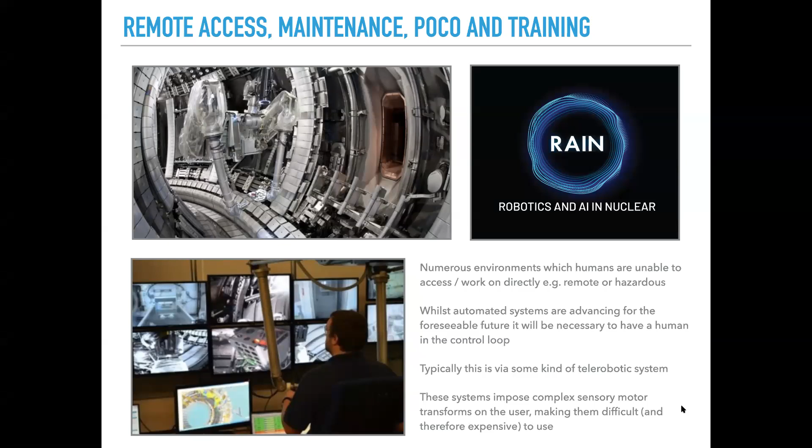So the key to a teleoperation system is making working in the remote environment as effortless as if you really are there yourself. People use this kind of phrase that the system should be transparent to the user. Here you have just a simple schematic from Barfield.

We have our user in a remote location operating some kind of hardware in the environment, interacting with real-world objects, and the user is getting some kind of sensory feedback from the robotic device, which they're using to control it.

The key thing here is that the user has to build some kind of mental model as to the relationship between their own movements and the movements of the robot. In some senses, the ideal situation is that the kinematics of the user and the kinematics of the robot have a one-to-one mapping with one another. However, this is clearly not possible in most instances.

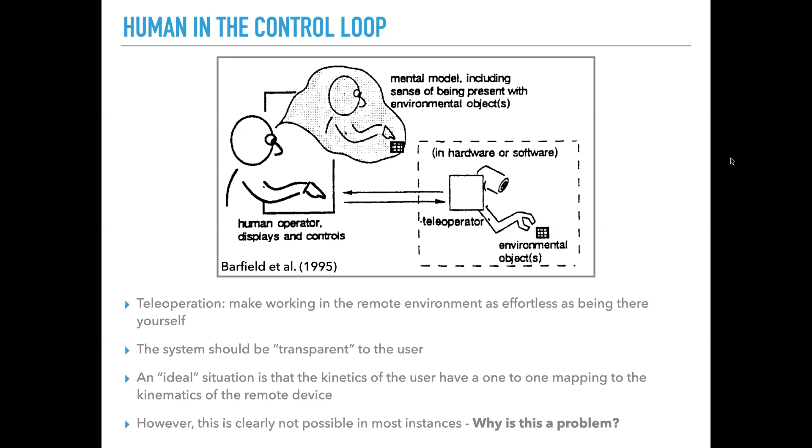So why is this a problem? Well, the brain is just a fancy computer in effect, a neural computer, but a fancy computer nonetheless. And it takes in information in the form of sensory inputs, does some kind of computation on those sensory inputs, which results in some kind of motor output.

And that motor output might be something very simple, such as picking up an object in everyday life, or indeed it might be something much more complicated, such as using a teleoperation system.

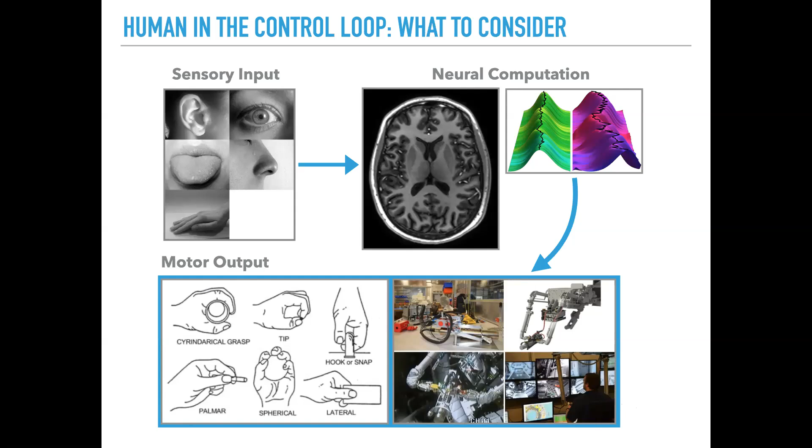There's actually a lot of clear evidence that in programming sensory motor actions, the human brain effectively computes an internal forward model of the action in order to predict the sensory consequences of that action. Then the brain compares this to the actual sensory feedback from doing the action. This comparison allows the brain and the user to learn how to do a task and indeed improve a task over time. We can kind of see that in this schematic here.

So the brain produces a motor command which is sent to the sensory motor system. The action is performed and the observer gains some kind of sensory feedback. The key thing here is that actually what happens in the brain is the motor command is duplicated into what is called an efference copy.

This is used to predict what the sensory consequences of the action will be. Then the two are compared and some sort of sensory discrepancy is computed. In doing this, this allows the user to improve at the task over time.

The key thing is that there's a huge amount of evidence that shows that imposing sensory motor transforms negatively impacts performance, slows learning, and indeed requires some kind of adaptation procedure over time.

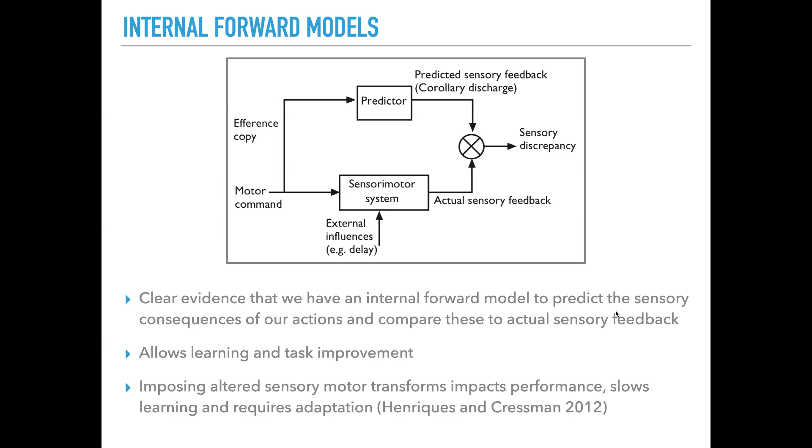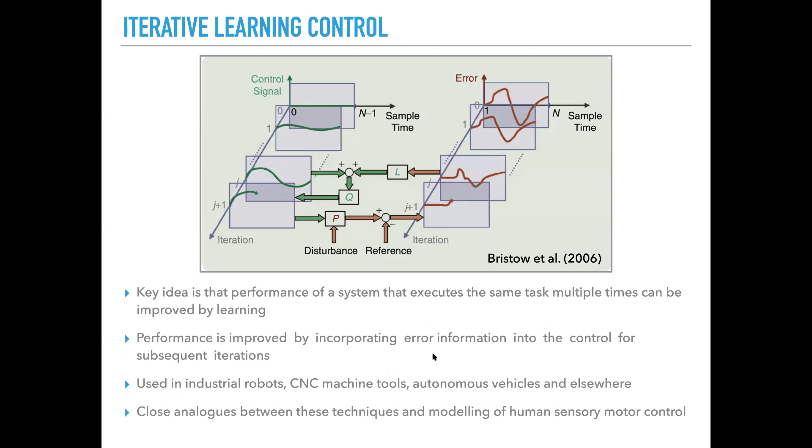This is actually a very engineering-focused model, even though it's modeling brain processing. Some of you may be familiar with models such as this, the iterative learning model, used in a wide range of areas of industry and engineering. The key thing here is that through comparing a prediction to an error, one can improve performance of such a system over time.

So let's go back to where we started. This was our example. So what's the problem to be solved here?

Well, clearly, in most telepresence systems, there's a mismatch between the kinematics of the human operator in the control room and the kinematics of the robot in the remote environment. This obviously makes it very hard for the user to predict the sensory consequences of their actions. They don't know how their actions map onto actions of the robot.

A second issue is with this other part of the loop: it's really difficult for the human user to get precise sensory feedback as to the results of their actions. For example, an operator has to track their movements over multiple screens, and in a hazardous environment, these screens might be placed at very odd angles relative to the user, or provide impoverished information.

A final problem is that the user doesn't have access to a lot of information they normally would. For example, there's no stereo vision here from the remote environment. And as the observer moves their head, these views don't update as they naturally would. So that's the problem we're looking to investigate.

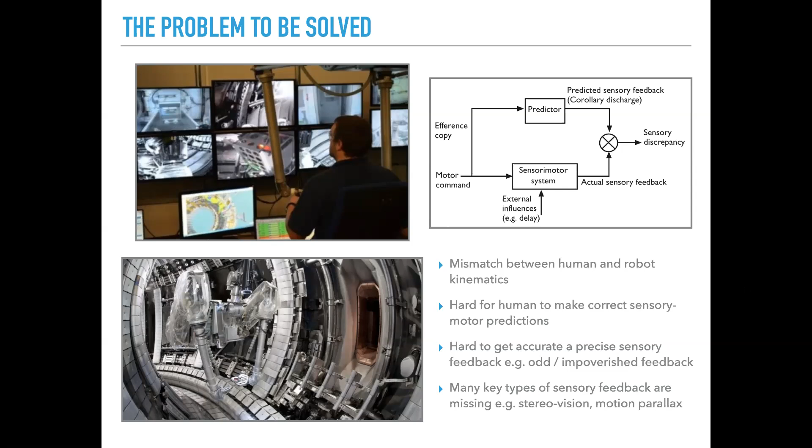So now for a few project specifics. Our aim here is to systematically map out the effects of mismatched physical and visual workspaces on the efficiency of a bimanual movement, in a visual haptic telerobotic environment.

So this is the kind of setup we're going to be using. We have a set of custom-made haptic robotic devices, very similar to the Phantom force feedback devices for those familiar with them. We have 2 devices per hand, so we're able to do bimanual manipulation with 2 points of contact per hand.

The visual information is going to be provided by an Oculus headset, so people will be in an immersive virtual reality environment. A key thing is we're going to be hooking these 2 systems up using our Vicon system, which will allow us to align the haptic and visual environments to millimeter precision.

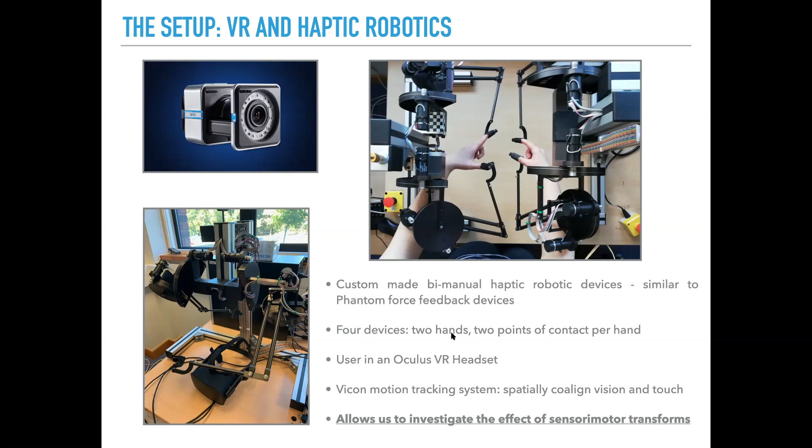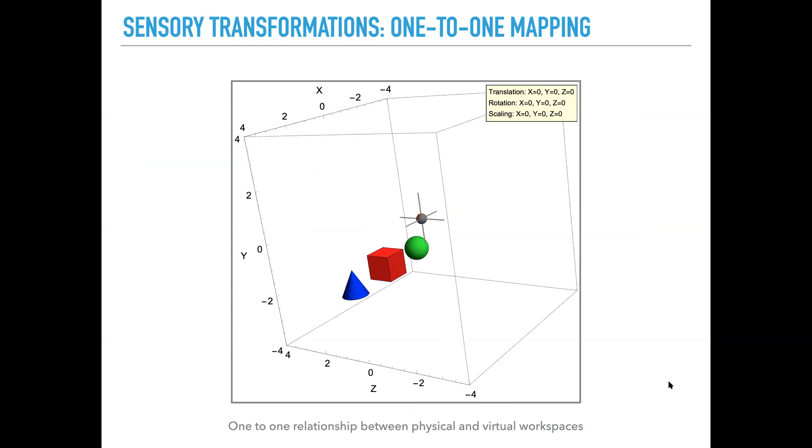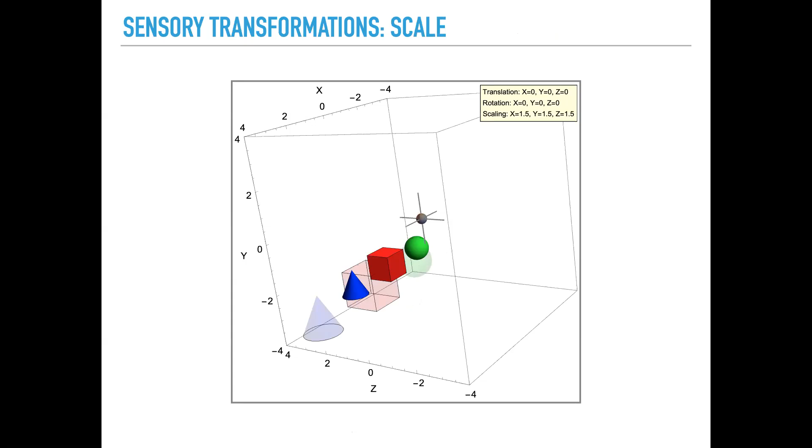However, in a telepresence system, one can have a whole range of transforms. For example, the virtual space might be translated relative to the physical space, or rotated relative to the physical space. There might be some kind of scaling or gain between the movements of the user and the movements of the robotic device. Or, what is more likely, there'll be some kind of complex combination of these transforms.

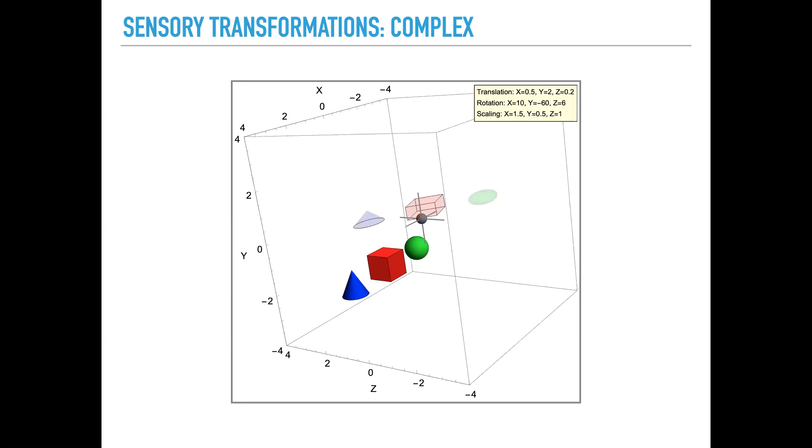So this is what we're going to be doing: parametrically introducing these transforms into our system and measuring the effects. The task we're going to be using is probably familiar to a lot of people: a post-operational clean-out type task.

We're collaborating very closely with RACE, especially my Glovebox demonstrator, to build a very real-world task. The task will involve bimanual manipulation of objects, passing objects between the 2 hands, since we're able to do that in our system, and also posting these objects out through a slot. So a very familiar task, presumably, to a lot of you.

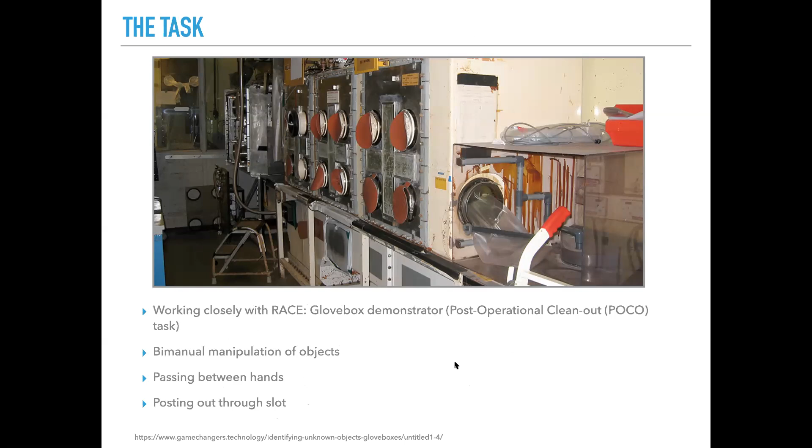So what characterizes good movement performance? How are we going to measure the effect of these transforms? No one really knows exactly what characterizes a good movement, but there are some ideas. A movement carried out quickly and efficiently would probably be better than one carried out slowly. There are also metrics like smoothness: fewer velocity peaks in your movement profile is generally considered better. Similarly, for a repeated task, the variance of endpoint parameters is a good measure of efficiency. There are indeed larger scale optimal models which attempt to optimize movement parameters.

Whilst the telepresence system in effect offers the ability to build beyond the efficiency of natural movements, currently telepresence systems are far from the elegance of an everyday movement, such as reaching out to pick up an object. So what we're going to be using in our project is real-world movements as effectively the gold standard to which to compare telepresent movements.

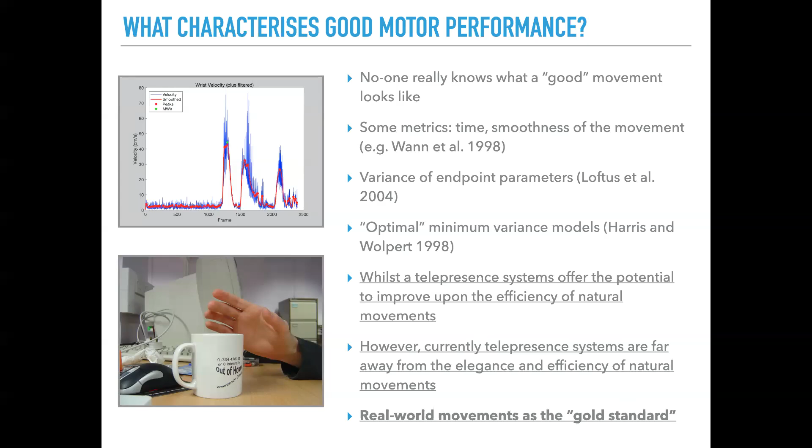Here's a quick schematic of our task. We're going to be using a post-operational clean-out type task, duplicating a real-world setting in a VR haptic environment. We'll be directly comparing motion parameters from humans tracked in a real-world task with a Vicon system to the same task duplicated in the VR haptic environment. This allows us a baseline comparison of real world to VR haptic telepresence.

Key thing here is that with our VR and telepresent environment, we are able to introduce these transforms systematically: for example, translations between the workspaces, rotations between the workspaces, and scaling between the workspaces. This will allow us to say, maybe we'll find that translation and scaling offsets don't really matter that much, they don't really impact performance. But if we're imposing rotations between the physical and the virtual workspace, this could be really detrimental.

So the key idea here is that we are taking an understanding of how the brain processes sensory motor information, parametrically manipulating these transforms, and trying to feed into, one could say, a manual for how to design and best optimize a telepresence system. What does one need to get right, and what can one afford to get wrong?

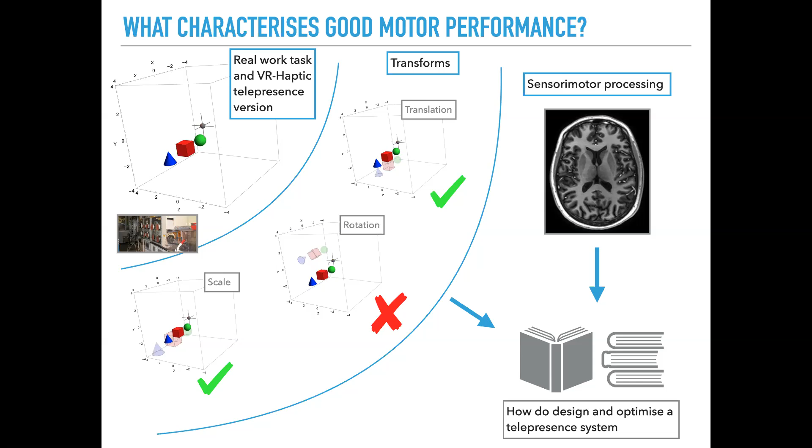So, final slide. If you just take one message away from this, it is that with a human in the control loop of a telepresence system, it's completely essential to understand how the brain processes sensory information, how that sensory information is integrated and compared to predictions about what the sensory output of our actions will be, and how an observer or a user is able to adapt to these transforms over time.

That's everything. Thank you very much for listening, and I'd be happy to take any questions.

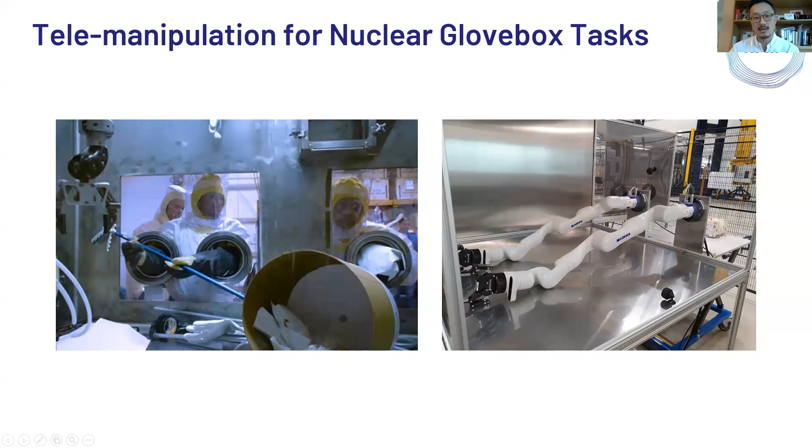The system architecture I am thinking of is so-called AI-assisted teleoperation. Basically, in this system, a human operator can teleoperate the robot as a typical teleoperation system, but there is another control element which generates assistance depending on the situation by sensing the environment. By having such AI assistance, I believe we can have better performance and safety.

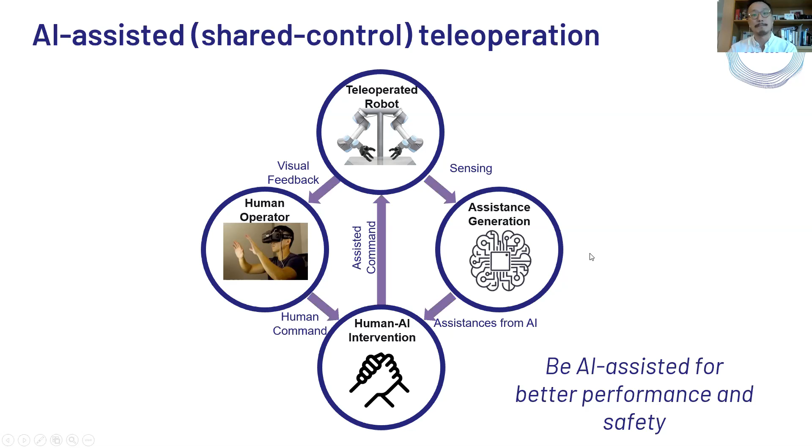So given this context, what I have been investigating so far is twofold. The first one is about the user interfaces. Particularly, I've been thinking about what would be easy, intuitive, and cost-effective user interfaces. Personally, I'm interested in using a Leap Motion sensor by which we can teleoperate this kind of robot with our bare hands, like this video.

I believe this method is quite intuitive because in this demo, I just asked Dr. Andy Weightman to try this system, and surprisingly he was able to pick up this object without any training. This is his first trial.

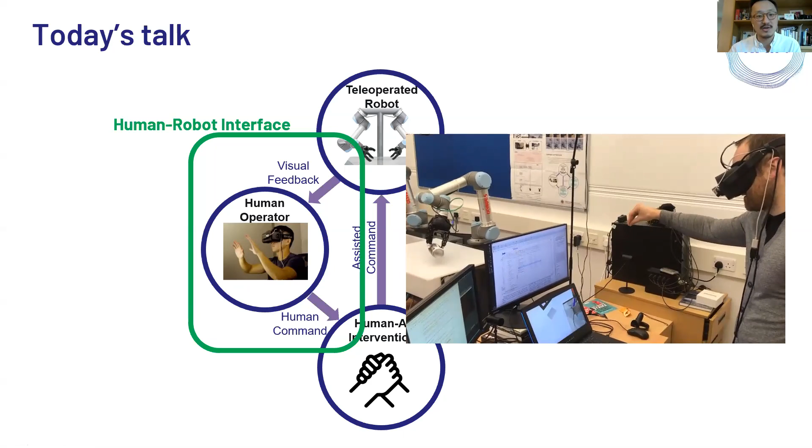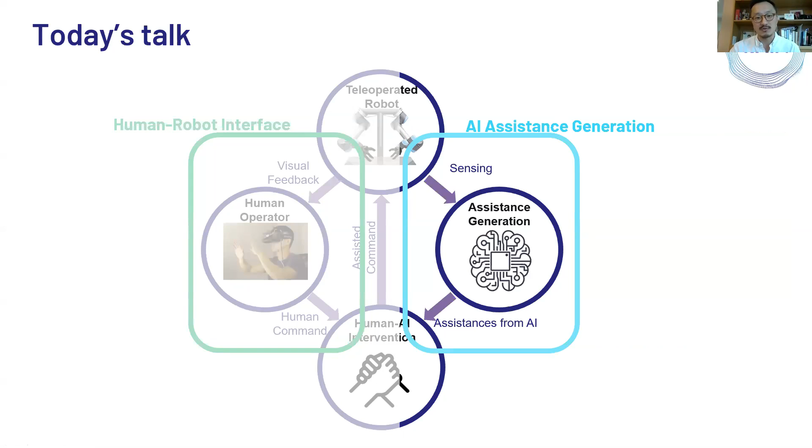The second topic is about how to get assistance from AI. Today I will present this one in more detail, particularly how to achieve collision avoidance during teleoperation tasks.

Let's imagine we are doing a teleoperation task. Without any obstacles, we won't feel any worries and we'll be okay. However, if there are some objects that the robot shouldn't collide with, then this teleoperation task may require the human operator to be super careful. So this task could be like this kind of mission.

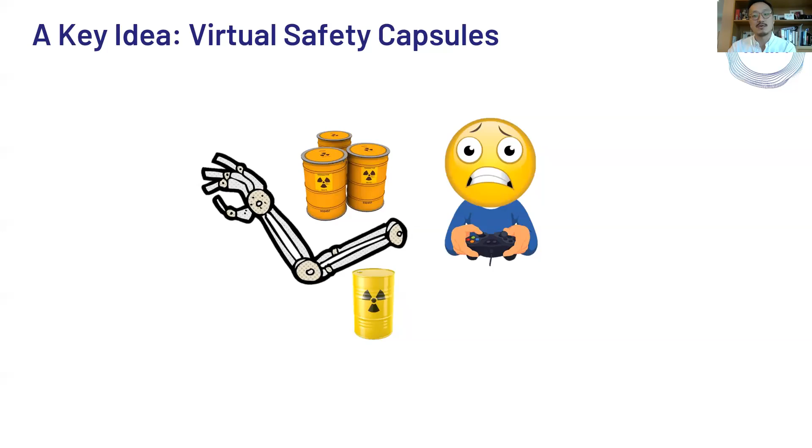So to minimize such human operators' worry during the manipulation task, the idea is to use a concept of virtual safety capsules like this. These capsules make sure that the robot arm will not collide with the object inside the capsules, even if the robot arm is accidentally moving toward them. I believe this kind of safety feature is very important.

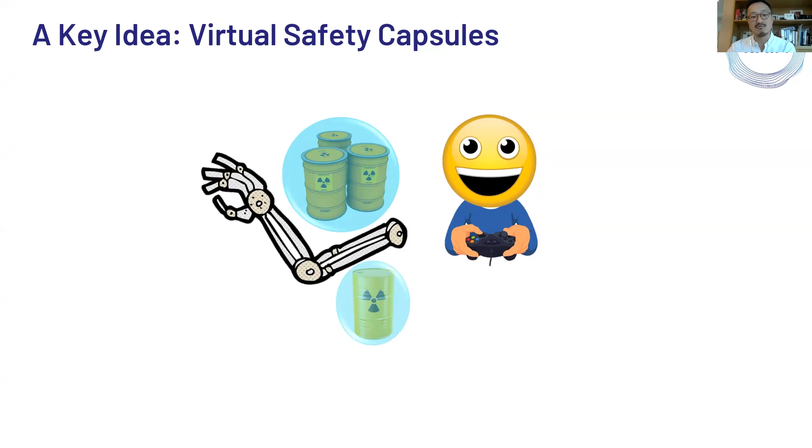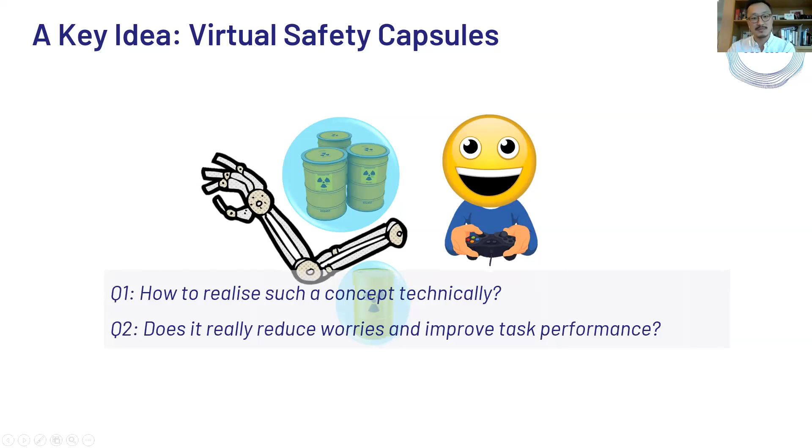It could reduce human operators' psychological workload, and also it can reduce the gap between mock-up training and real nuclear operation. So then the questions are how to realize such a concept technically, and does it really reduce human operators' worry and improve task performance? For now, I'm going to talk about my answer regarding the first question.

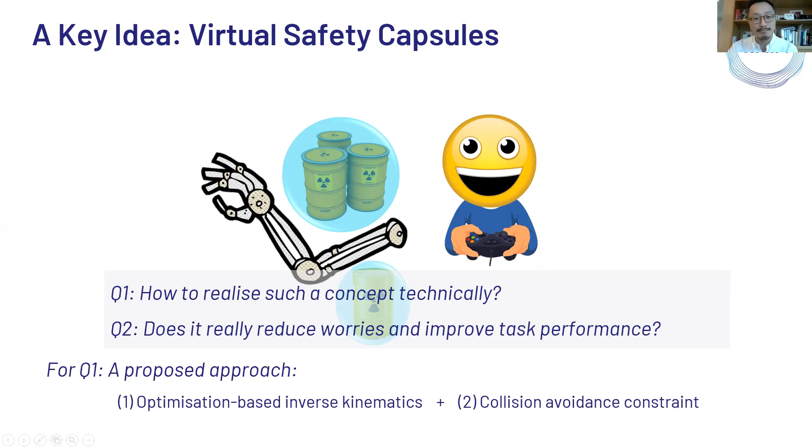My proposed approach is to use optimization-based inverse kinematics and collision avoidance constraint. Here, please note that I assume that the system can recognize position and size of obstacles by using any computer vision technology.

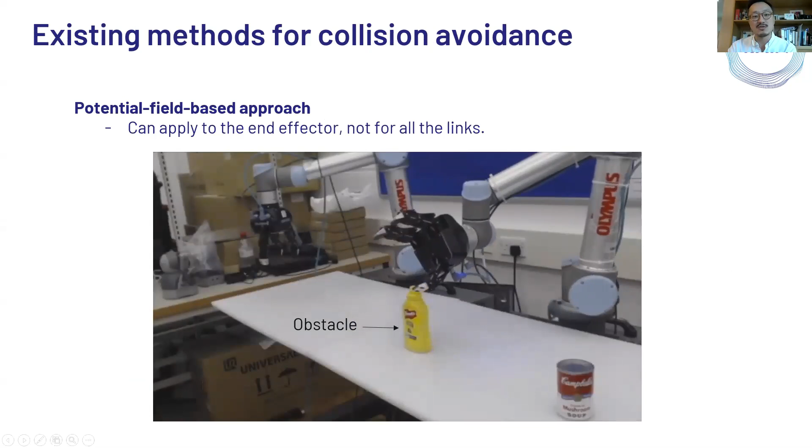Before that, I'd like to mention some limitations of existing methods for collision avoidance. First is the potential field method. This method basically generates a potential field that guides the robot's end effector towards a safe area. However, as you see in this video, many of the recent works only consider the end effector's collision avoidance, not for the entire robot arm. That's why this kind of elbow can collide with this obstacle.

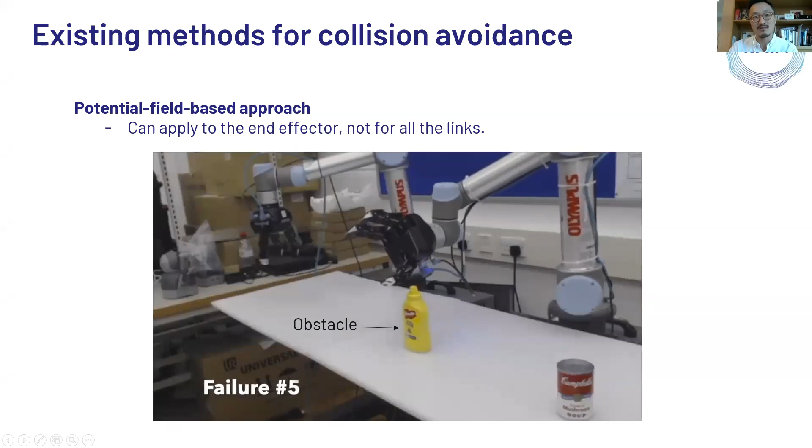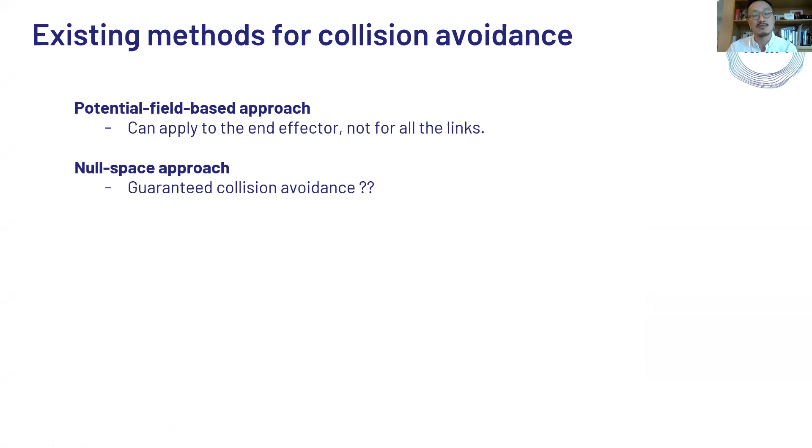Secondly, we might think of a null space-based approach. However, from our experience, it does not fully guarantee obstacle avoidance, and also it does not have any allowance for us to add additional AI features. I will talk about it in more detail later.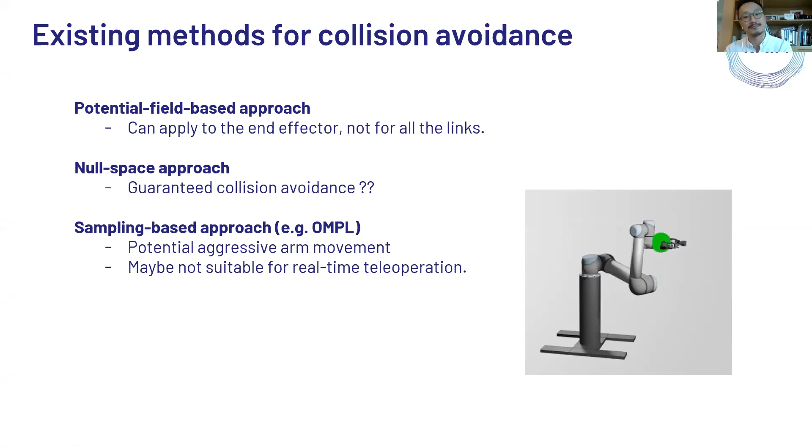Another way is to use a sampling-based motion planner, such as OMPL in MoveIt in ROS. However, as you see in this video, and also from my experience, often it could end up with such aggressive movements. Also, often it takes time to obtain a full trajectory, so it does not seem to be suitable for real-time teleoperation. So our approach is to use optimization-based inverse kinematics.

Instead of using the inverse Jacobian matrix for the inverse kinematics problem, we can formulate that problem as an optimization problem like this. One of the benefits of doing that is that we can include multiple desired features that we want the robot arm to behave by adding additional cost terms here and also additional constraints here.

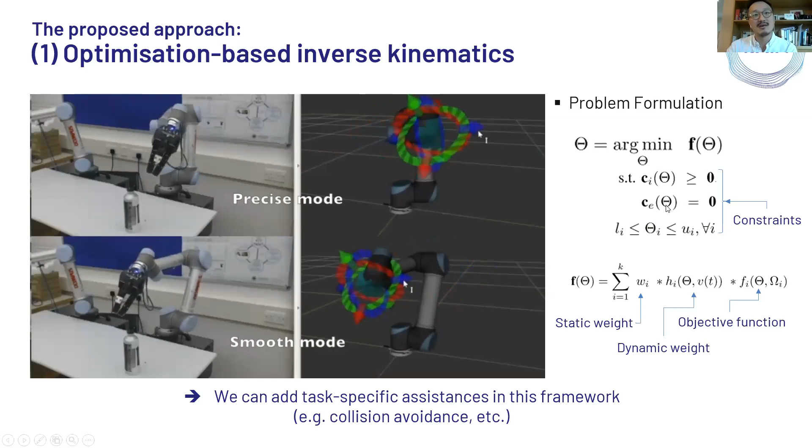In this demo, the cost function includes the end effector's position and orientation matching and smoothness. Here, I put a higher weight factor on smoothness for this bottom demo. That's why the robot moves more slowly than the first case. So depending on the weight factors and also the cost function and constraint, we can add some desired features into the robot arm's behavior.

Based on such optimization-based inverse kinematics, we can add the collision avoidance constraint. Let's say the space of the obstacle can be defined by multiple H functions. Here, what we want is the robot position. Let's say this is robot position. The robot position should not belong to the obstacle space.

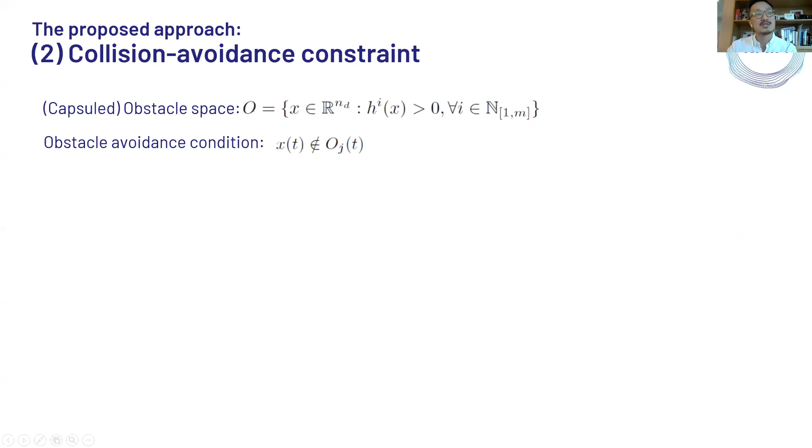Its physical meaning is that the H functions here are slopes of the obstacle, and the obstacle space is the intersected area where all the H functions are positive, so this area. By following this kind of mathematics—I'm not going to talk about its details—the original obstacle avoidance constraint condition can be reduced to this kind of equality constraint.

By applying this into the previous optimization-based inverse kinematics, we can have multiple benefits. For example, the collision avoidance constraint can accommodate nonlinear shaped obstacles, and also multiple obstacles can be integrated into this single constraint. For example, by having this type of H function, we can have polyhedral obstacle shapes, or by having this, we can have ellipsoids, and also we can make this kind of complicated shape obstacle by having customized functions.

I tested this obstacle avoidance constraint by using a simple path planner based on model predictive control with a simple double integrator model. So from here, start point to goal, you can avoid the collision with the obstacle.

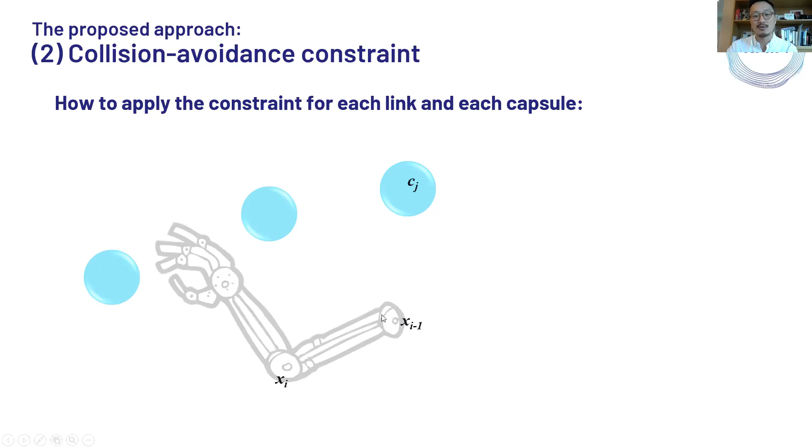Now we are using this constraint to make sure that all the links, the entire arm, will not collide with the obstacle capsules. Let's say we know the position of the capsules, and also we know the positions of the two ends of each link. Then we can have these vectors from the geometry.

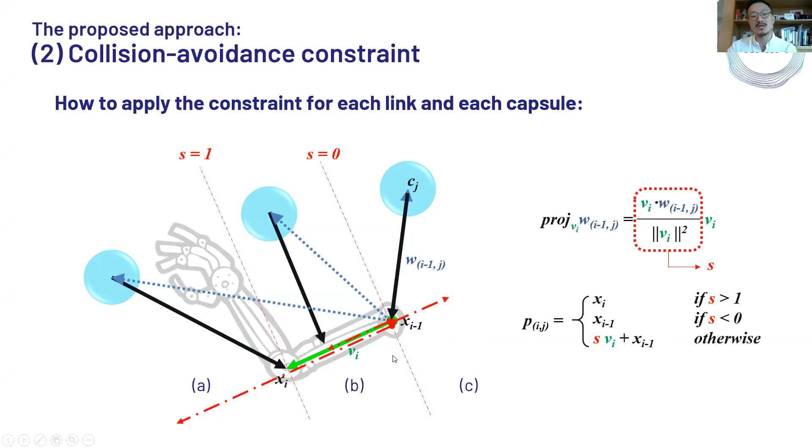By using this formulation, we can compute the projected vector of W onto V. This term, denoted by S, indicates the normalized size of the projected vector. Depending on the value of S, we can conclude whether the capsule is in this area, this area, or this area. By having these conditions, we can get the closest point from the capsule towards the link, depending on the S value. By doing so, we can consider the collision avoidance of the entire robotic arm.

To implement this approach that I explained before, I basically used ROS, but a library called ROS-Rust, which is an equivalent version of rospy and roscpp. Rust is a quite new programming language.

Personally, the reason why I'm using Rust is actually because I wanted to use this toolbox. This toolbox is an optimization toolbox called OpEn. This is also a fairly new toolbox, developed for optimization of embedded systems or robotic systems. Although this toolbox provides MATLAB, C++, or Python API, from my experience, using the Rust API is much faster than the others. So I directly use Rust. That's why I use Rust as well.

So in summary, we propose a collision-free inverse kinematics method, which seems to work quite well. But we should also notice that the 15% additional capsule thickness should be considered.

For future work, this still needs further rigorous analysis with more randomized tests. More importantly, we need a user case study to look at whether a human operator really has reduced worries or reduced workload when this system is used. And I think the method can be used for other applications as well.

For example, let's imagine the robot arm in a human-robot collaboration workspace where the human worker is just walking around the robot. In that case, we can capsulize the human worker with this safety capsule so that the robot can avoid the human worker in this collaboration workspace.

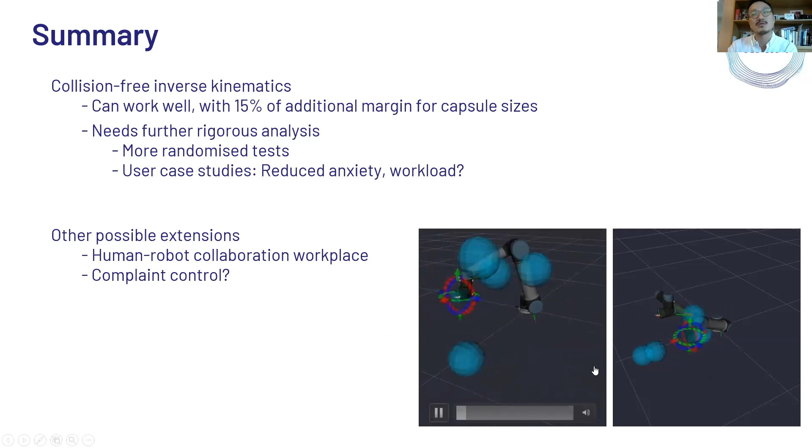Also, as you can see in the second video, we can push the robot using the safety capsule. So it could show potential to be used as a kind of compliant replacement for compliance control, because the UR5 doesn't have compliance control function inside, so maybe it could be used for this.

So thank you very much for your attention, and I'm happy to listen to any questions and feedback from you. Thank you very much. Thanks, Inmo.

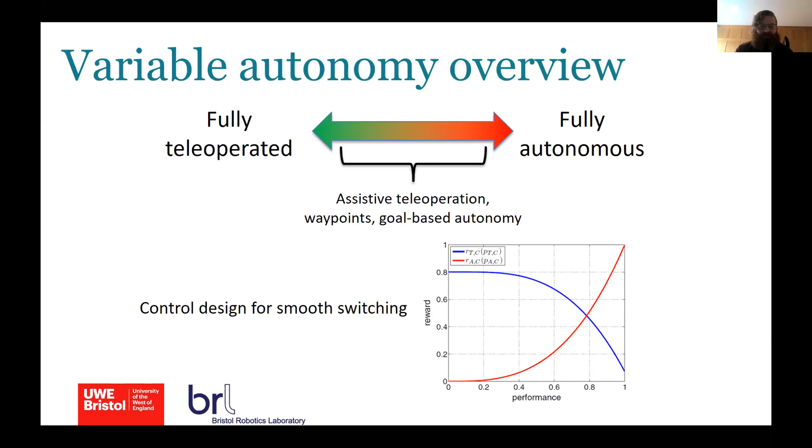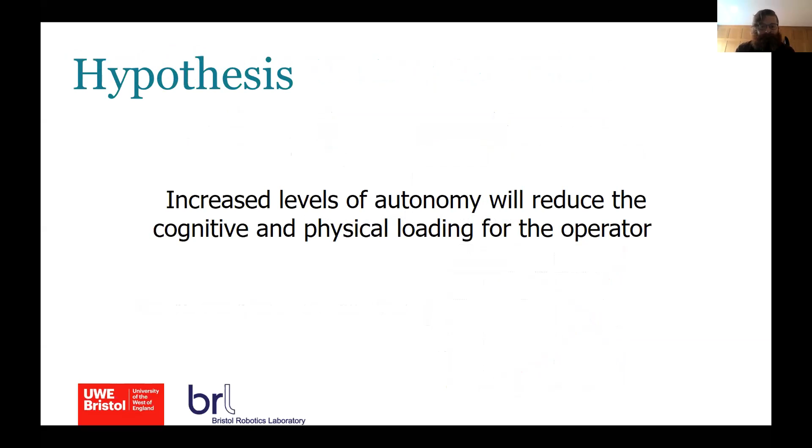The hypothesis for my study is increasing the levels of autonomy in a task should reduce the cognitive and physical loading for the operator.

My study setup is we have two mirrored teleoperation robots. These are Franka Panda arms, which we've been working with Lincoln University to develop the control for. It's just a pile sorting task, so the user gets 6 objects in front of them, in front of the remote robot, and has to use a master robot within a line of sight to sort those 6 objects into 3 different bins.

I will be running 60 participants first, mostly from people within the lab and with robotics experience, but then later on, hopefully have access to nuclear operators who would do this kind of task normally within their job.

We're looking at physical loading by measuring the forces that are applied on the master end, and cognitive loading will be based on NASA TLX questionnaires, and also physiological measurements such as heart rate and galvanic skin response.

We'll also look at how the failure modes happen. Obviously within the nuclear industry, we want to minimize failures as much as possible, so see how we can identify those and work against them, and conduct user interviews as well, so that we can get a better idea of what the main problems with the control modes are.

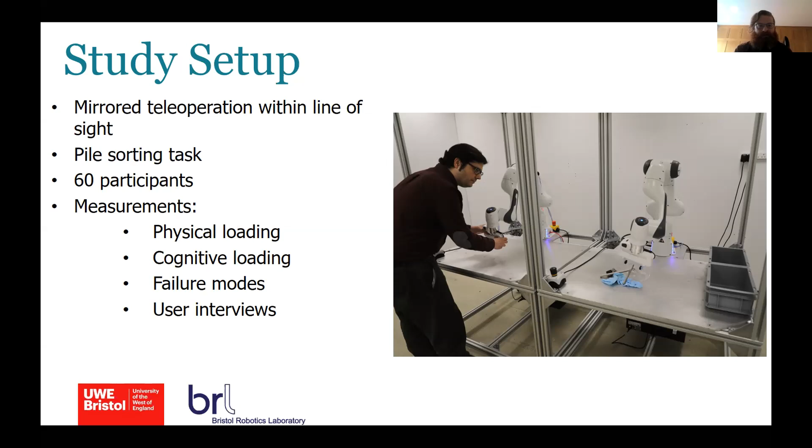Within my study, I'm running 3 levels of autonomy. The first one is no feedback at all - it's a straight joint-to-joint mirroring of the manipulators. When you move one, the other one moves exactly the same, and there's no feedback at all, so that if you hit an object or the table, the master side won't be able to feel it.

The second level of autonomy is guided teleoperation. Objects and obstacles on the slave side will have a virtual force field placed around them, and there is also feedback if you touch the table. The last one is autonomous long movements, where the user carries out the more complicated part of finding an object and picking it up, and then uses a keyboard to basically tell the robot where to go.

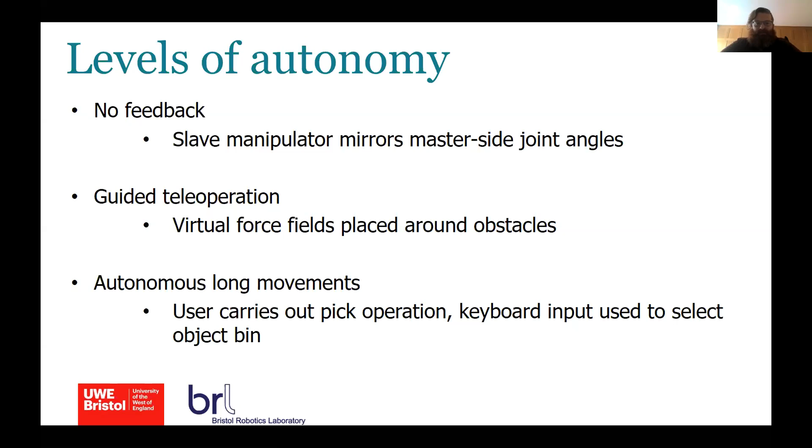We're looking at also physiological measurements. On the left-hand side, this is some data from a galvanic skin response, basically measuring the conductivity and resistance of your skin, normally with two electrodes placed against your fingers. There's various ways of looking at the data - in this case, there's a number of peaks in the response, and normally the idea is the more peaks you get in the GSR, the more it indicates cognitive loading. On the right hand side, there's a whole bunch of other different methods for physiological response, such as oxygen levels, eye tracking, skin pressure, and that kind of thing.

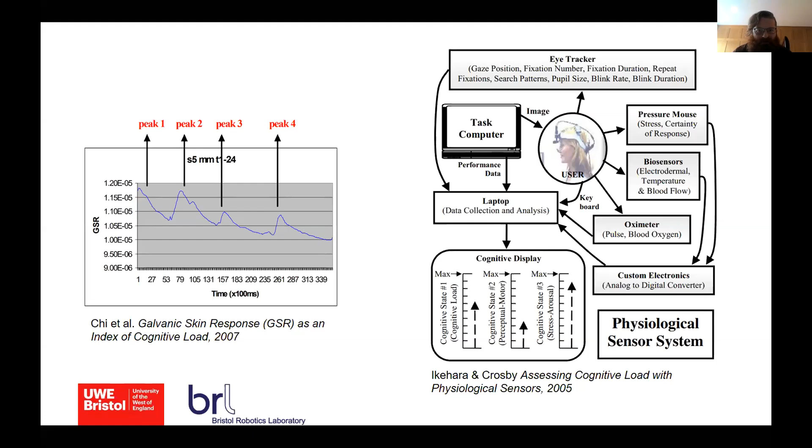So I think if you can play the video now, Laura. I'll try. Yeah.

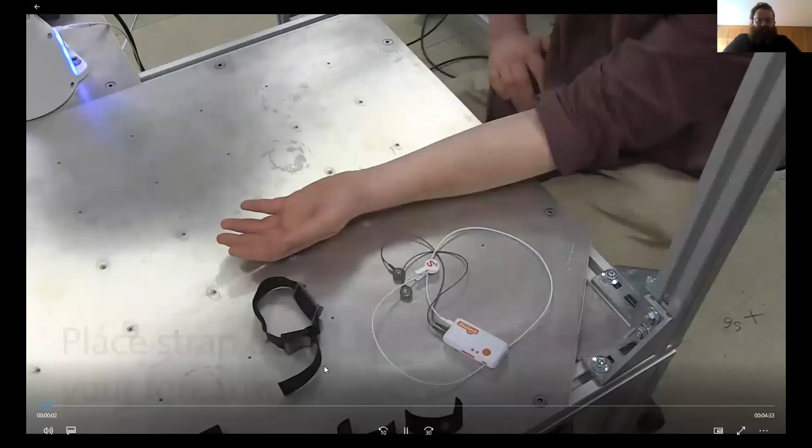The video that hopefully we can see will be the instructional video for my study, just to give you an idea of what the study looks like. We're using something called the Shimmer sensor, which does the galvanic skin response and heart rate monitoring.

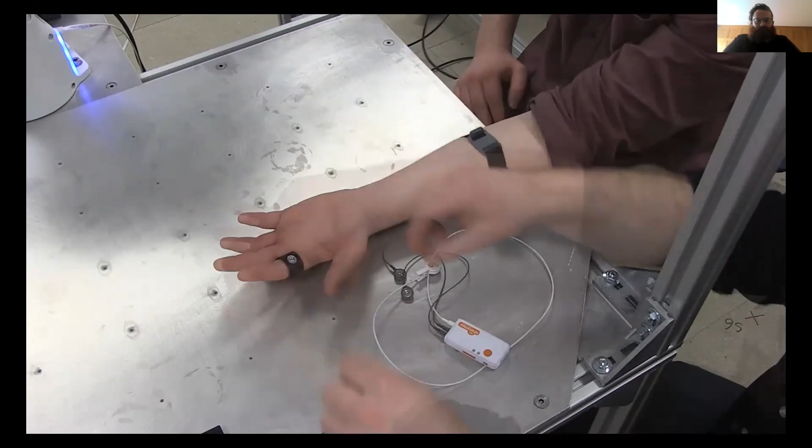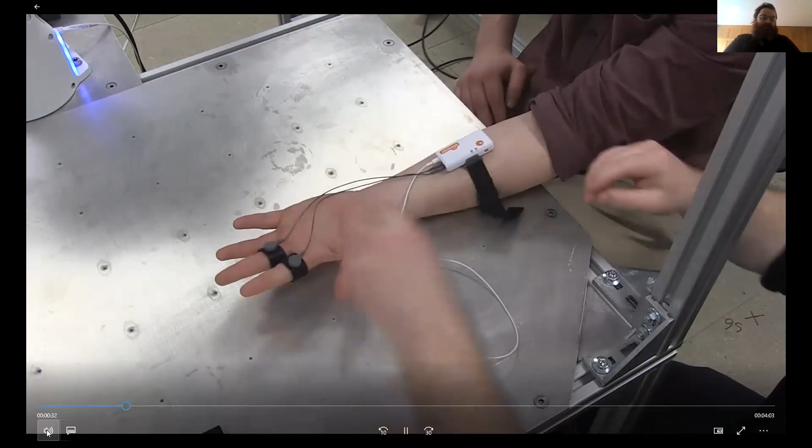The Velcro straps are where the GSR sensors sit. Unfortunately, there's a problem with this sensor in that whatever hand the sensor's on is the hand the user can't use, so I've had to design my study so that participants can do everything with one hand, as the heart rate monitor touches the earlobe. So this is the first condition where there's no feedback.

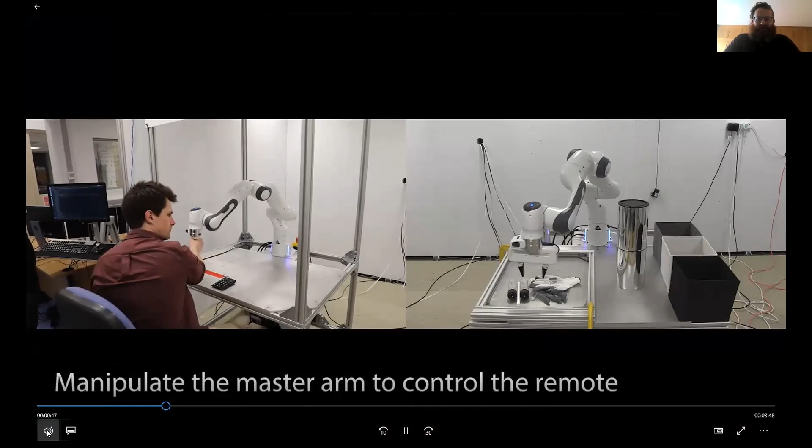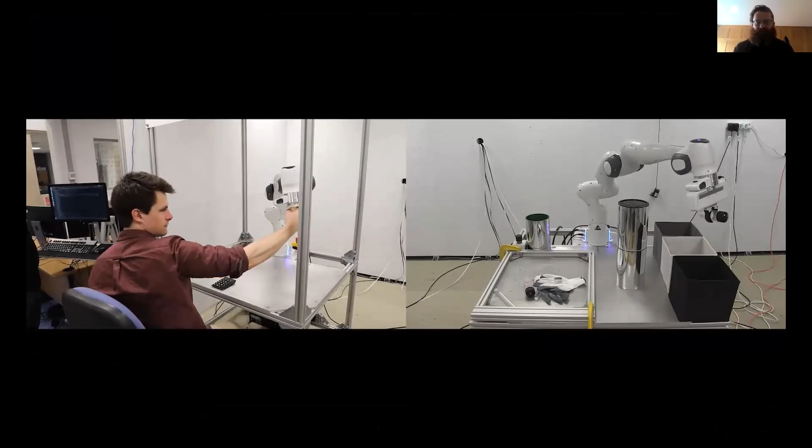The user has line of sight, so they don't have to worry about whether they can see the objects or not, and then it's just simply picking objects up and putting them in the correct bin. There's a couple of small barrels in the way, which act as our obstacles for the study, and the user uses a keyboard in front of them to open and close the grippers.

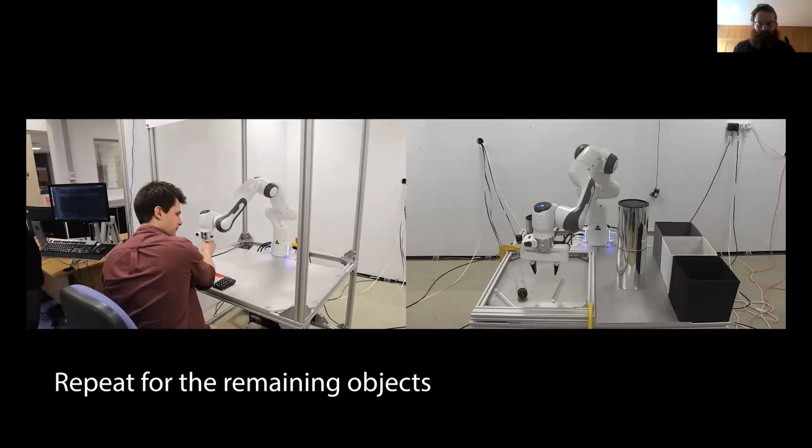The participants are given as much time as they like to carry out the study, and one of our measures will be how quickly it's carried out.

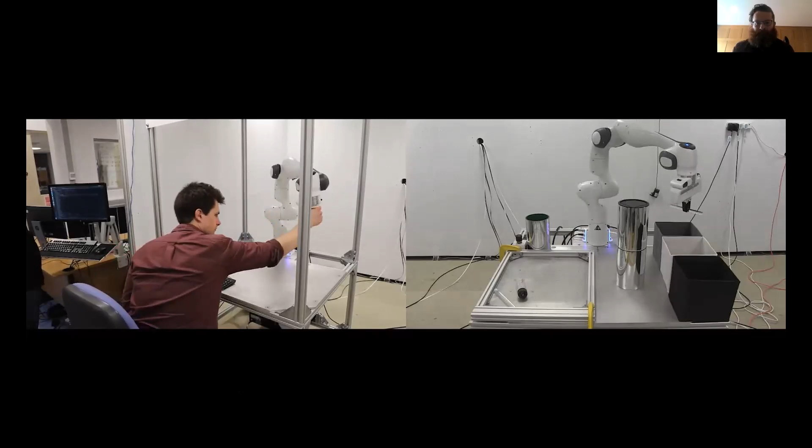So in this condition, there is a force field that acts around the barrels, and there is feedback through the table as well. So if they touch the table, they should feel it on the master side, and the task is exactly the same again.

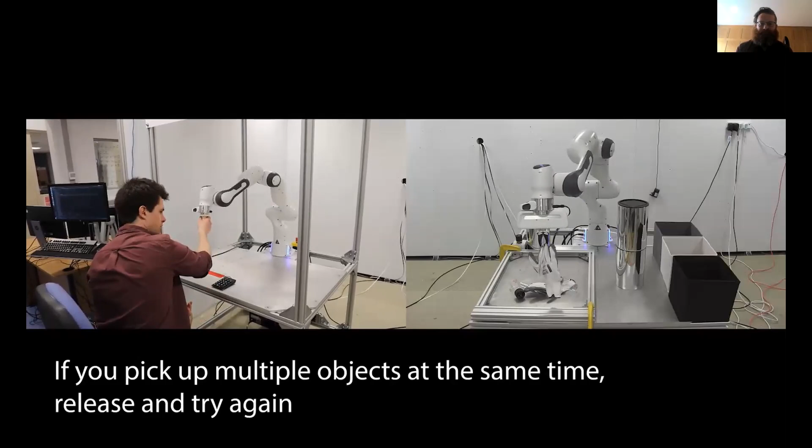So you can see here, it's difficult to see in a video, but there is a force field acting around the barrels, so you can't touch them.

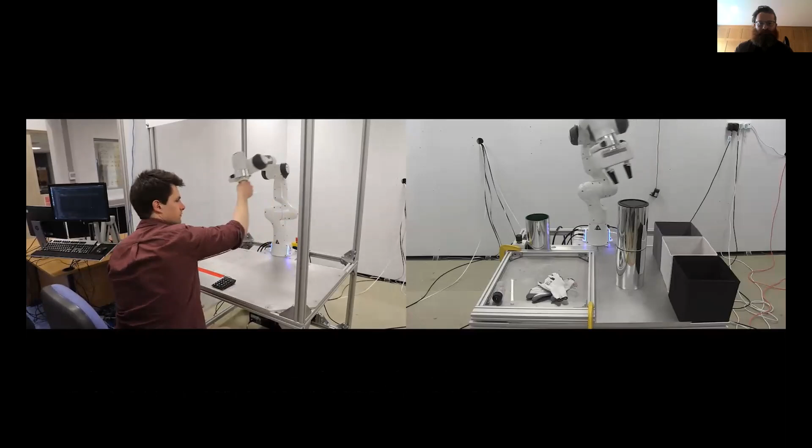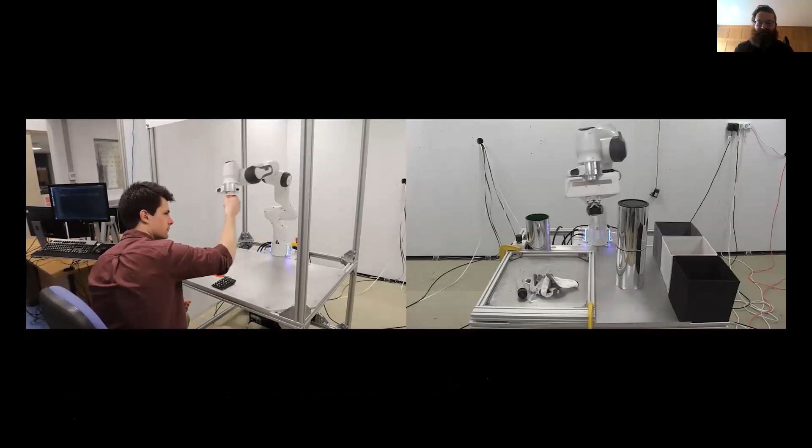This is something related to Immo's work as well, where the links of the robot can actually impact with the object. That's something we could think about looking at.

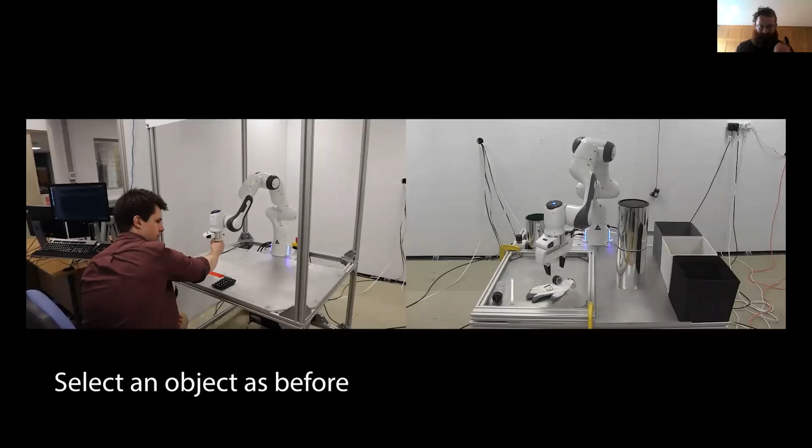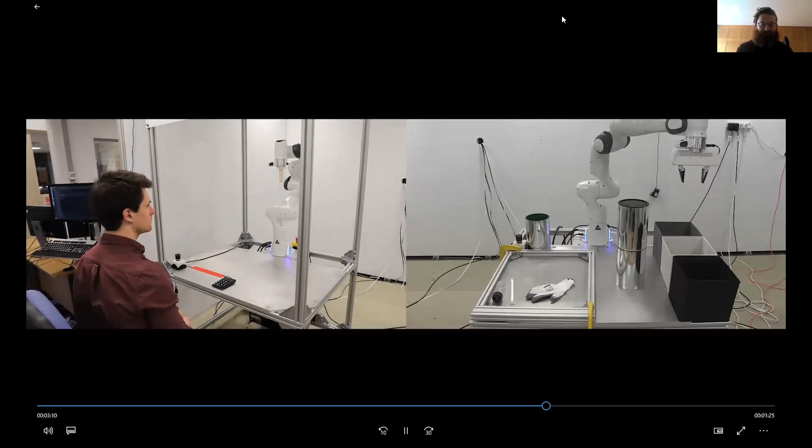This is the third condition, where it's more autonomy. The robot moves into position, a tone is sounded so the user knows it's gone into manual mode. They move it to a grasping position on an object that they choose, then they can pick a bin number using the keypad, and the robot automatically moves to that position and drops the object. That's repeated for all objects as well.

So I think that covers my study at the moment.